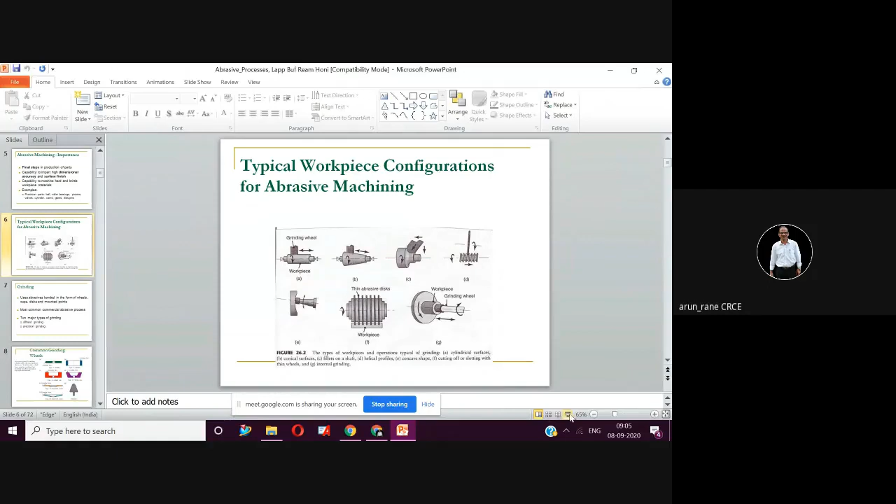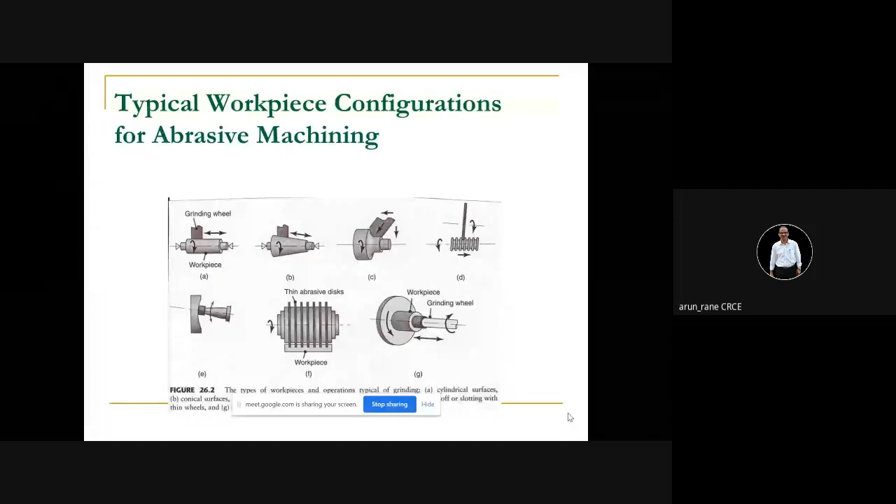So let's start, yesterday we stopped here. Renan, is the screen visible? Yes sir. So yesterday I explained the different types of grinding and how the mechanisms are, and I also told you there are two types of grinding: offhand grinding and precision grinding. Precision grinding means the grinding which is done on machines.

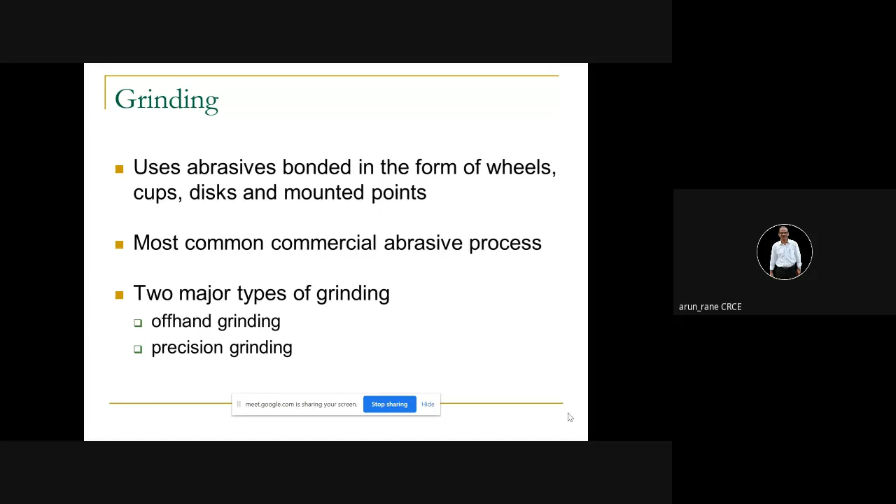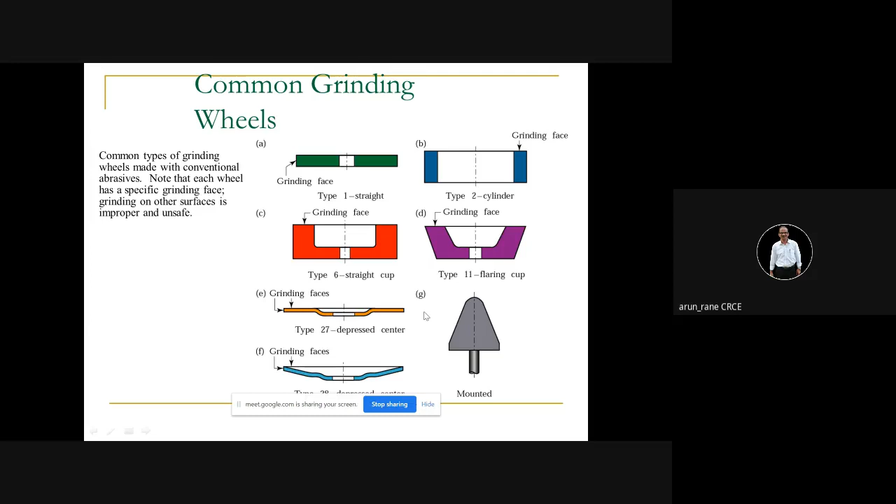Offhand grinding means very open, you must have seen students doing it with a flexible grinder, so that is called offhand grinding. These wheels are used in offhand grinding, and can be easily mounted on the hand grinder, which is nothing but a kind of drilling machine. You just mount this grinding wheel on the drilling machine and it can be called a flexible grinder.

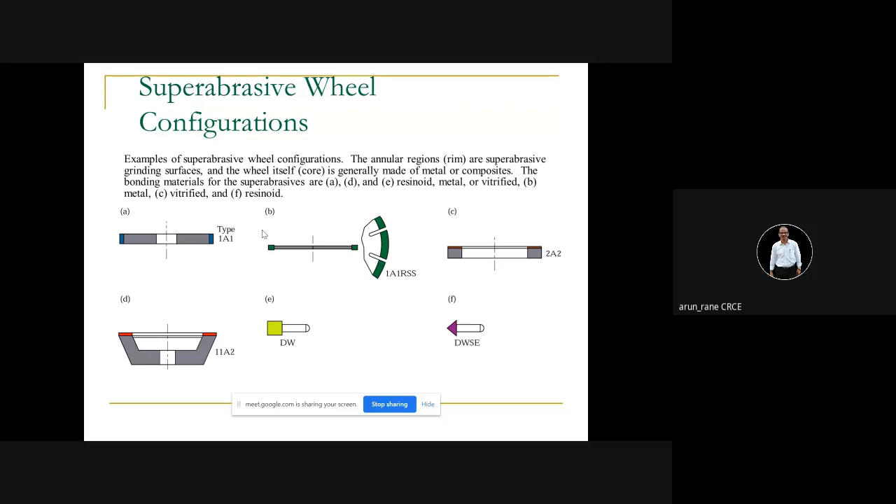Then this type of grinding wheel is also used, called the super abrasive wheels. But you can skip this slide because it is not important from the examination point of view.

This is how your grinding wheels will look like. Basically there are two types of grinding wheels: one is aluminum oxide, and another is silicon carbide. Other wheels are also used, two more wheels, that is one is CBN and another is diamond wheels. So altogether there are four, but two wheels are commonly used: aluminum oxide and silicon carbide.

Out of these, one is for ferrous and another is for non-ferrous. Ferrous means having iron, and non-ferrous means like aluminum, copper, brass, bronze. So generally for ferrous we use aluminum oxide, and for non-ferrous we use silicon carbide.

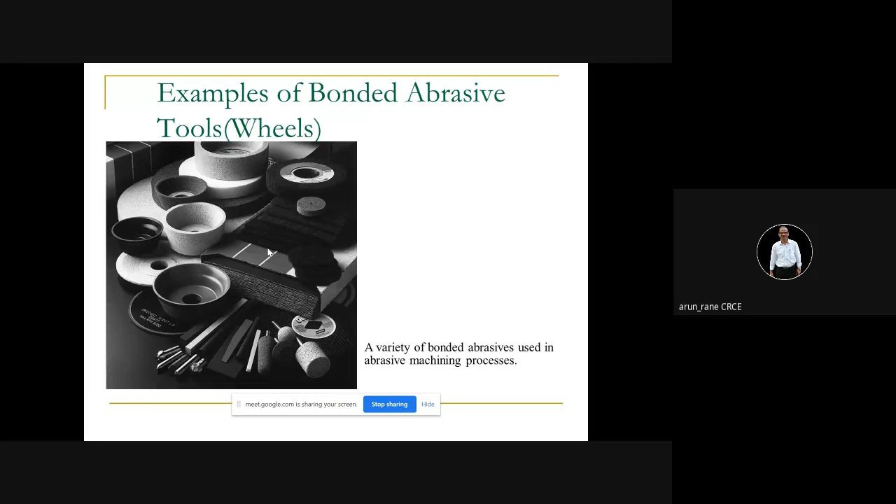Then when to use CBN and when to use diamond wheels: CBN and diamond wheels are also used for ferrous and non-ferrous, but for hardened components. So components which are hard, after heat treatment, if you want to do grinding, then we use CBN and diamond wheels.

So again in offhand grinding you have types: swing type, non-swing type, flexible, non-flexible, etc. Like you must have seen in many workshops we have a pedestal grinder. So pedestal grinder comes under the category of offhand grinding, where you go to the machine with a tool or component and grind it.

So what is the use of this offhand grinding? You can use it for grinding castings, sprues, flashes, runners or gate. Mostly many times flash comes in the casting. Flash is nothing but the extra material which has come out of the parting lines, that is what is called flash.

Then weld grinding, like weld, in order to make it even we grind it. This is commonly used. Tool sharpening, that is your drill grinding or HSS tool bits, single point cutting tools, those kind of tools can be ground. Then miscellaneous rough grinding, like if you want to cut something, that also can be ground. So all this comes under offhand grinding.

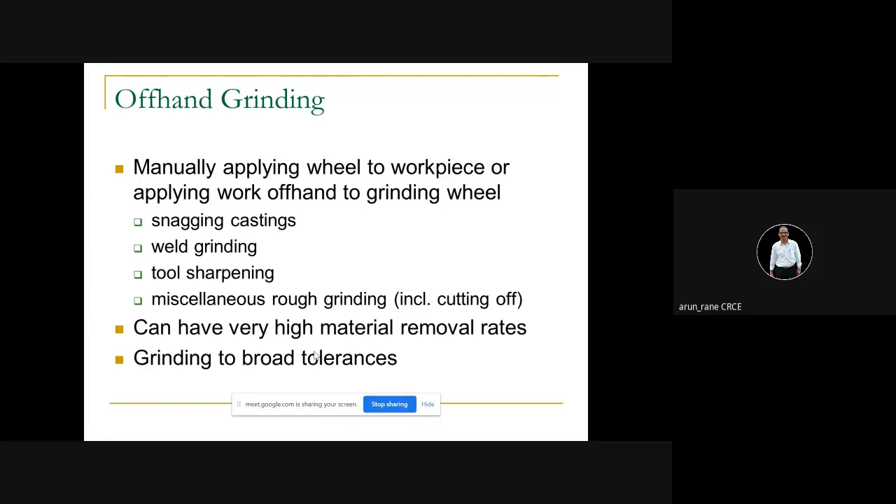Then precision grinding is again classified into cylindrical grinding, surface grinding, tool and cutter grinding, centerless grinding, and some SPMs, that is special purpose machines like crankshaft grinding or cam grinding, and so on.

Actually, I was calling Sahil just before the class, but he was not picking up the phone.

So this precision grinding is very important, and all grindings are important - like in precision grinding, cylindrical grinding, tool and cutter grinding, centerless grinding. Except SPM, that is special purpose grinding, because these are for specific products like crankshaft grinding or camshaft grinding.

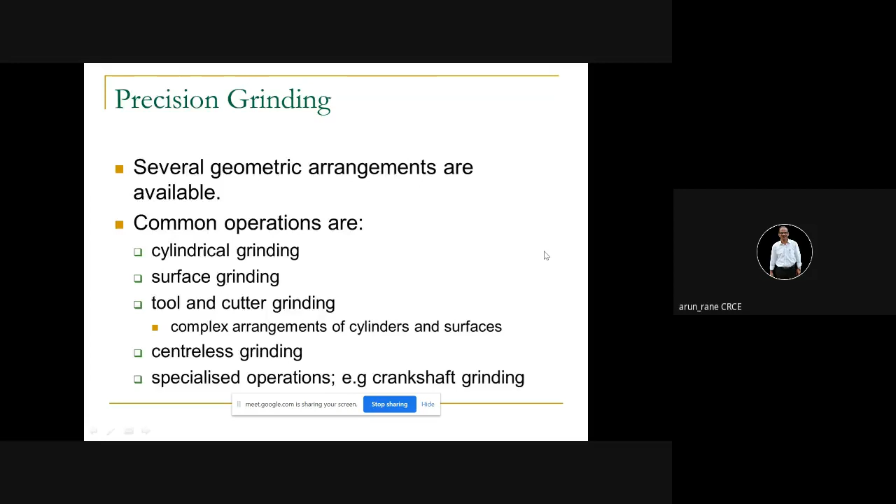So this is how it is classified, you can remember this chart. Precision grinding is classified under cylindrical grinding, surface grinding, and centerless grinding - these are the three which are really important. In cylindrical grinding, you have external cylindrical grinding and internal cylindrical grinding. In surface grinding, you have peripheral grinding, and there are four different types not mentioned here. In centerless grinding, you have external centerless grinding and internal centerless grinding.

External cylindrical grinding has traverse and plunge. In internal you have rotating work and stationary work - generally nobody uses stationary work, so this can be cancelled out. In centerless grinding, external has through feed and in-feed. All these are important from the examination point of view.

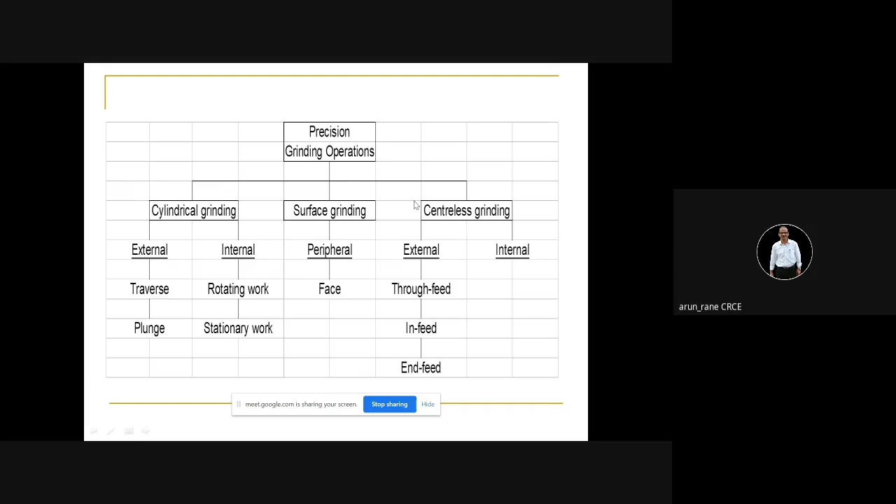In surface grinding, again there are four types. One is reciprocating table and vertical spindle. Second is reciprocating table and horizontal spindle. Third is rotary table and vertical spindle. And fourth is rotary table and horizontal spindle. So there are four types of surface grinding, and all four are commonly used.

So in cylindrical grinding, as I showed you the pics in the beginning of the lecture, the wheel is rotating and the workpiece is also rotating, and the wheel is moved across the workpiece parallelly. For machine time calculations you need to remember the cutting speed, feeds, and depth of cut, but no numerical will be asked on grinding.

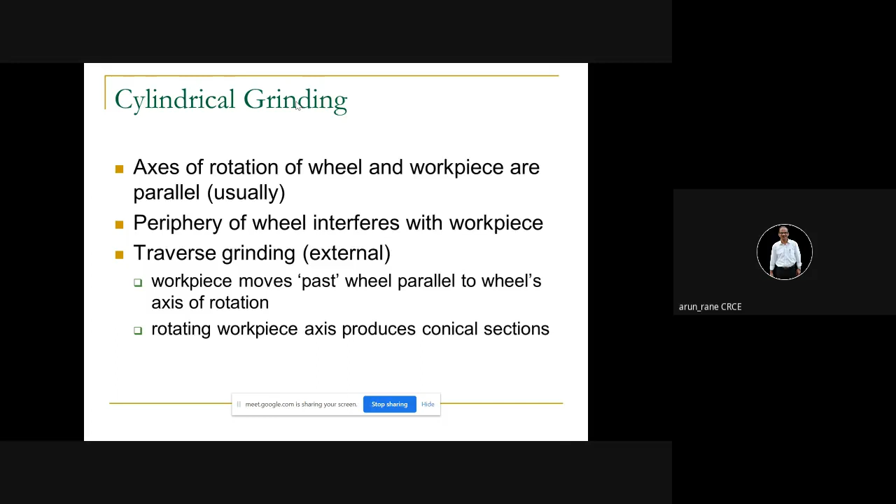So in cylindrical grinding, you can do plunge grinding and traverse grinding. In plunge grinding, what do we do? We press the grinding wheel across the workpiece, and the form is given to the grinding wheel, so whatever form is on the grinding wheel is reproduced on the workpiece. Of course, you will have to rough turn or rough mill before this - you cannot generate the entire surface because grinding is a slow process.

So in plunge grinding, whatever shape is given to the grinding wheel is reproduced on the workpiece. And in traverse grinding, the grinding wheel is fed axially across the entire length of the workpiece.

The workpiece is usually fed or loaded between the centers, and if you are loading it between centers, you have to use a driving carrier on the live end, also called a dog. The driving carrier is used so that your workpiece will rotate with the machine speed. Otherwise, if mounted between centers, there is a chance the workpiece will slip and not rotate positively. That's why all between-center jobs have to be rotated with the help of the driving dog.

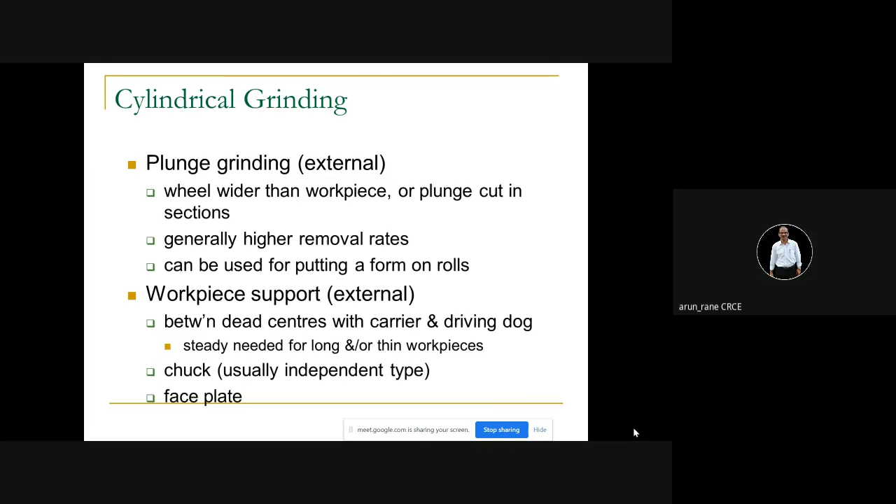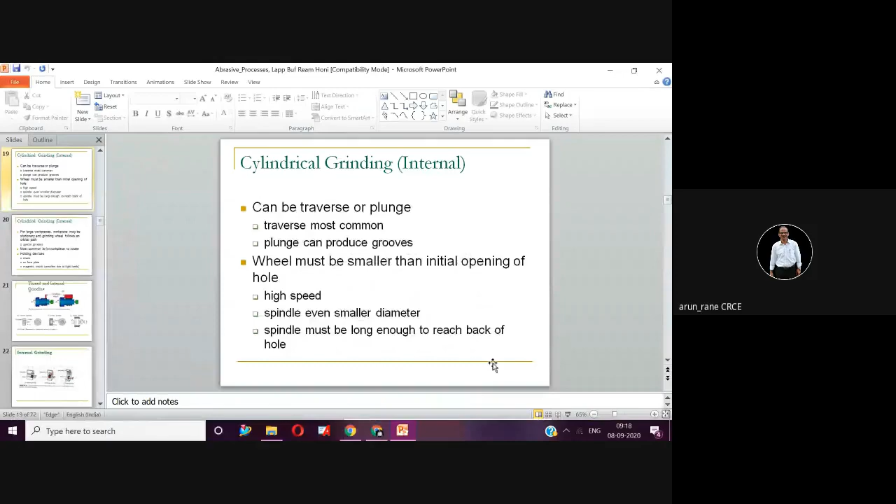Just a minute. This we are done, this we are done. I think I have gone a bit ahead. Yeah, so we are here.

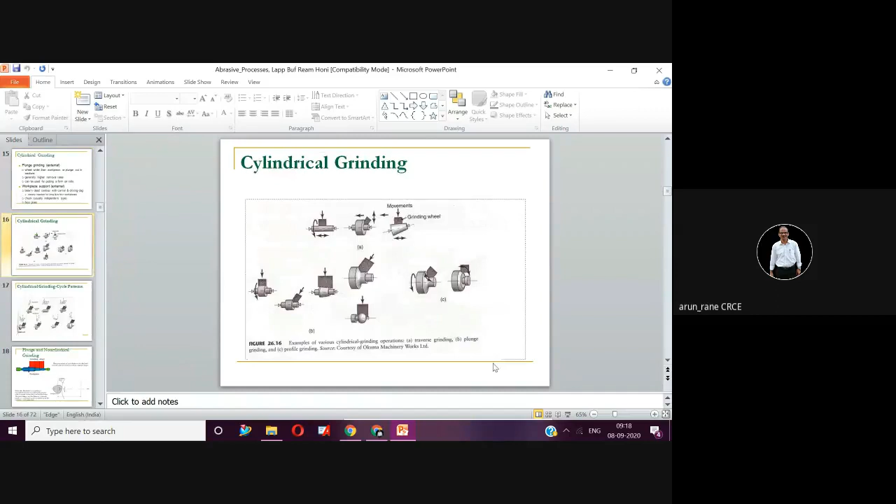So this is how cylindrical grinding is done. Now here the component is mounted between centers - see, this is between center, this is between center. The grinding wheel is fed here and then it is moved. Most of the time the workpiece is moved longitudinally.

Here again, the grinding wheel is fed like this. Here also, instead of the grinding wheel, the component is moved. And this is now a form grinding.

Remember, here the workpiece is tilted at an angle - this is one way of doing taper. If not, then you can give the taper angle to the grinding wheel. This can be done by three or four ways: one is you can tilt your workpiece, second is you can give the taper angle to the grinding wheel, or third is you can rotate the grinding wheel itself like the workpiece. So three methods.

Then these are the types of plunge grinding. Plunge grinding means the feed is given radially, and the workpiece is not moved in the axial direction. So plunge grinding is always faster, provided your machine is capable enough to take the load.

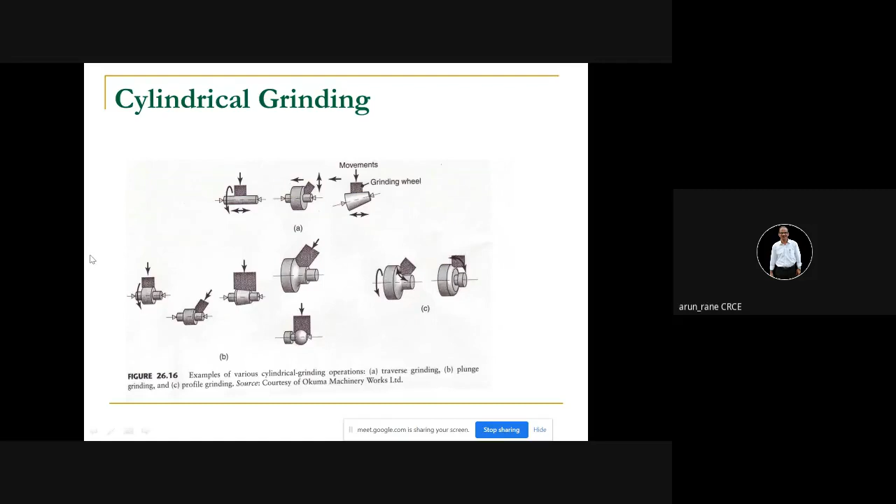These are the different movements, that is how the grinding wheel moves. It comes inside, goes like this, and returns, and it repeats.

Not important from the examination point of view. Now these are all seen. This is exactly like your lathe operation, exactly like your CNC grinding wheel.

But you are using a high speed tool or a carbide tool in a lathe machine. Here on the grinding machine you are using a grinding wheel which has been dressed like a cutting tool. So there is a point here, and then it is moved across the workpiece everywhere. This is actually an example of a CNC grinding machine.

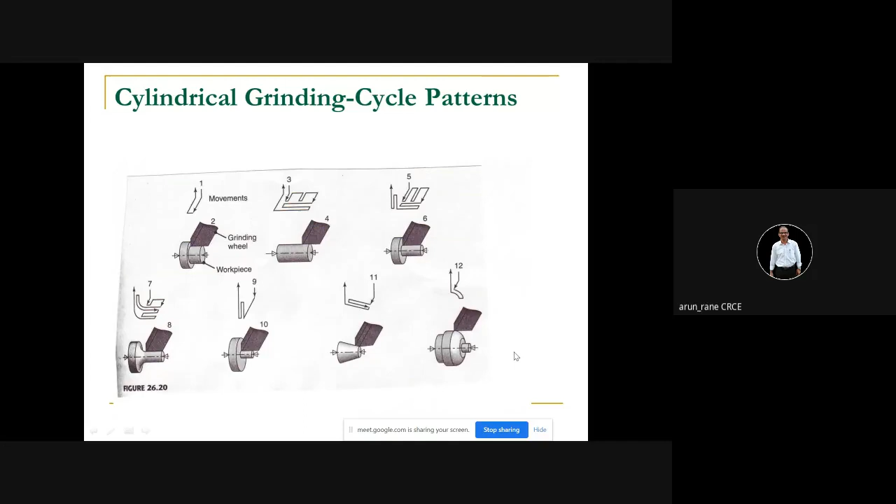So plunge grinding is useful if you have to do mass production, that is, number of components are more, accuracy required is more, and you have shapes like this which cannot be produced by your normal flat grinding wheel. This particular workpiece has so many contours and so many shapes, which cannot be handled by our normal grinding method. You'll have to change so many grinding wheels.

So what you do in this case, we take a grinding wheel having more width, then we raise this shape. We call this a male shape. Then we raise a female shape on the grinding wheel, and then we plunge across.

Generally, we don't use grinding for non-cylindrical workpieces. Cylindrical grinding, I am talking about.

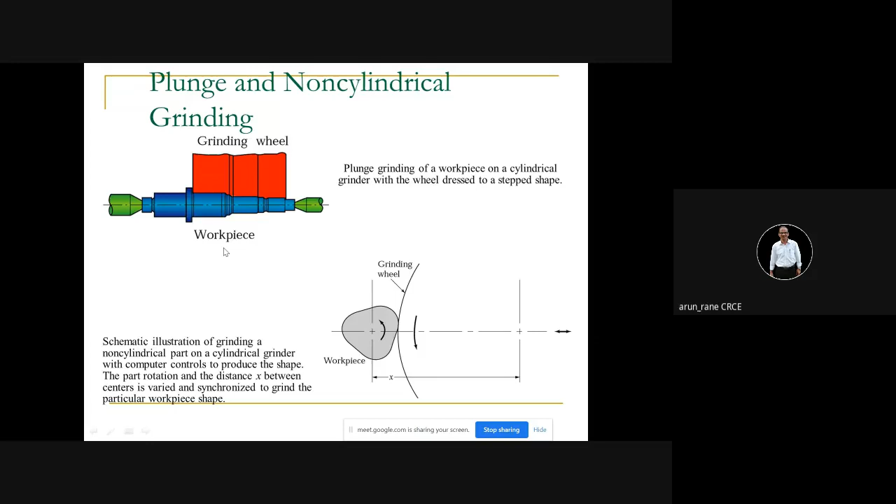Now, as I told, internal grinding is very very difficult, and generally we do it above 25 mm bores. If you want to do it below 25 mm, then we use a special machine called the jig grinding machine. For 5 mm, 10 mm, or even 4 mm holes, it can be ground on jig grinding machines. Below 4 mm, there is a separate technology; there are reamers available, or we do it on wire cut machines.

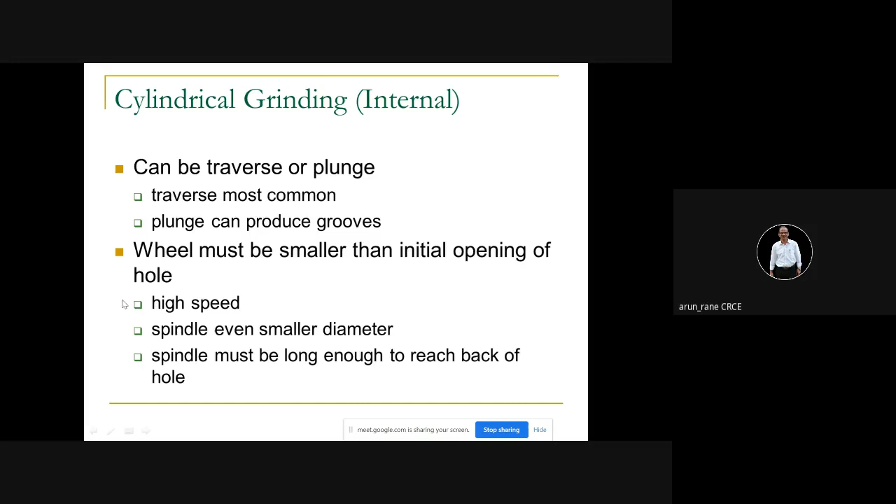Again, in internal grinding you have to be very careful. In internal grinding also you can do it by two methods, that is traverse grinding or plunge grinding. Obviously your grinding wheel has to be smaller than the hole diameter, which is quite obvious.

As I said, generally the workpieces are rotated. But if you want to keep the workpiece stationary, whether it is internal or external, let's talk about internal. Then your grinding wheel must be rotating, that is your internal grinding wheel has to be rotating. And second, your grinding wheel must rotate orbitally, along the bore, so that it will grind the entire periphery of the workpiece.

This is used generally in special grinding machines, SPMs, used for special workpieces.

Again, holding devices can be a chuck. Magnetic chuck also can be used, but these magnetic chucks are used for lighter workpieces. They cannot be used for heavier workpieces because magnetism is not strong enough to hold them.

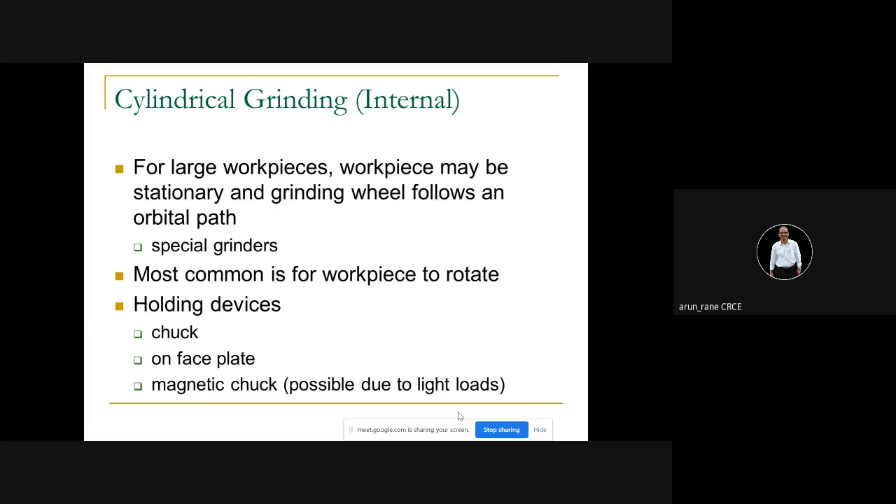Then you can also do threading, that is thread grinding. As I told, thread grinding is performed if the threads are hardened. Most of the times we don't harden the threads.

Suppose you have a component, like a shaft kind of thing, and you want to harden it. So what we do is we mask these threads before you send it for the heat treatment - we mask these threads, masking.

We mask this thread with the help of asbestos material. Asbestos, as you know, is heat resistant. So wherever it is masked, that much portion will not get heated. And the principle of heat treatment is: if it is not heated, then nothing will happen to them. So that is one way.

The second way is you apply a copper sulfate paste, CuSO4, on the portion which is not to be hardened. So for the threads, if I don't want to harden them, I'll apply copper sulfate solution here, CuSO4, so that this remains unaffected.

But now suppose if you want your thread also to be hardened, then definitely after hardening this profile will get damaged, get distorted, and also get oxidized, and then it cannot be used unless it is finished. So you have no choice but to go for grinding, because since it is hard, you cannot touch it up on a lathe machine.

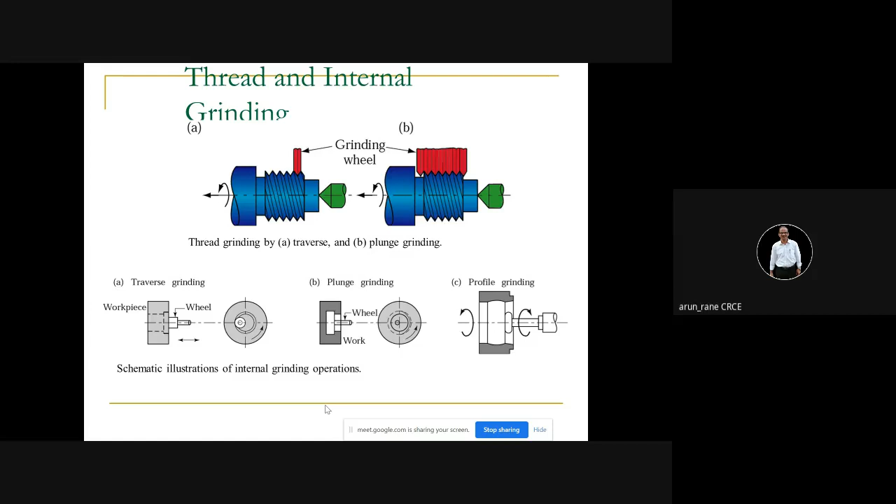So this is an example of profile grinding. I hope it is clear. This is still more clear. The cross sections are taken here.

So traverse grinding means the grinding wheel is rotating. This is the rotation of the grinding wheel. At the same time, the grinding wheel is also moving. So this is traverse grinding.

Here this is plunge grinding. In plunge grinding, what do we do? The grinding wheel is not moved in traverse. It is just plunged.

And then this is profile grinding. So the profile is ground to the grinding wheel and then it is plunged. I hope these pictures are clear.

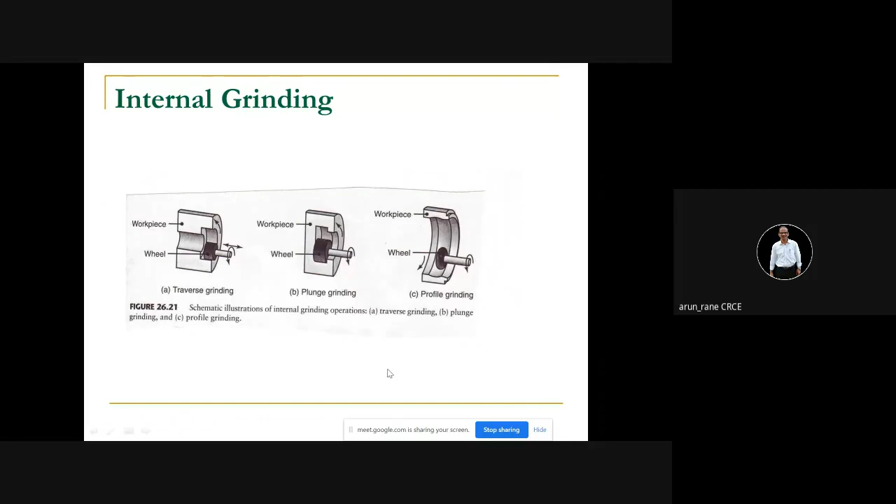Rotary tables are used for mass production. That is, say if you have 50 pieces, say 50 bushes whose face is to be ground, all those 50 pieces can be kept on the table and then the table is rotated. At a time you can grind so many pieces, 50 pieces, 100 pieces, depending upon the size of the table.

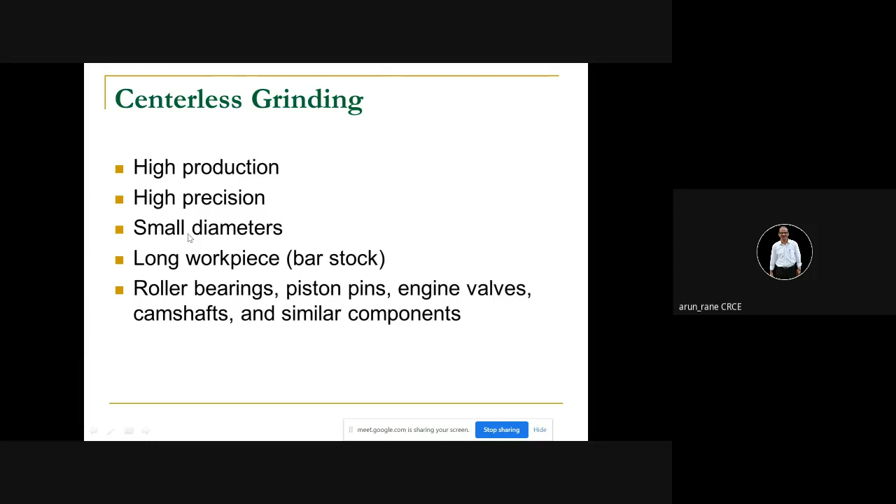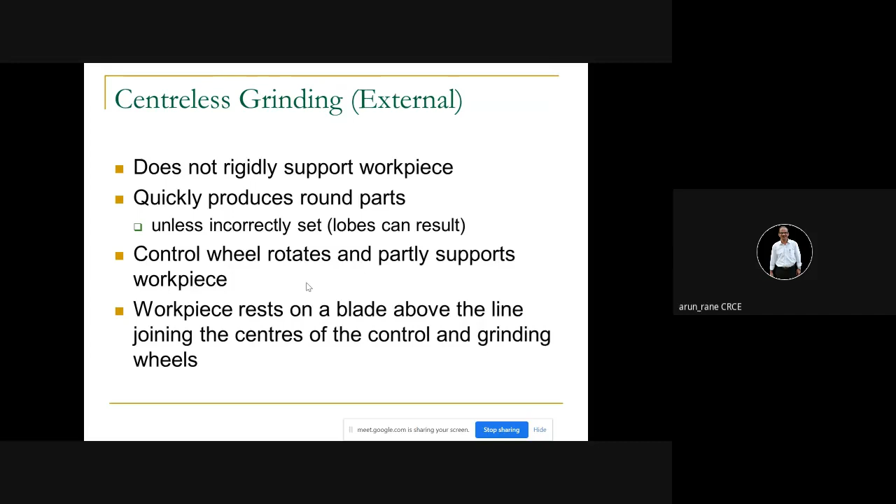Again, in centerless grinding you have external centerless grinding and internal centerless grinding. Normally we don't use internal centerless grinding because of the limitations on the grinding wheel, as I said. So most of the time, by default, centerless grinding is external. And as I said, the workpiece is not held between centers, and that's why it is called centerless grinding. You have three types in external centerless grinding: through feed, in feed, and end feed.

So through feed means the component is loaded from one side and then it comes out from the other side. That's what is called through feed. And how and why does it happen?

See, I'll show you the diagram of centerless grinding. In centerless grinding, the component is held - our component is loaded between two grinding wheels. And if one of the grinding wheels is tilted at an angle, then that gives the feed to the workpiece. That is what is called through feed. So the operator just has to load the component from one side and then it is fed automatically because of the angle given to the control wheel.

Then you have infeed. The infeed method is used for work with portions, like suppose you have two diameters - one is diameter 10, another is diameter 15, with steps, say 4-5 steps on the workpiece to be ground. That time you go for infeed. End feed is used only for taper work. And remember, we always follow through feed.

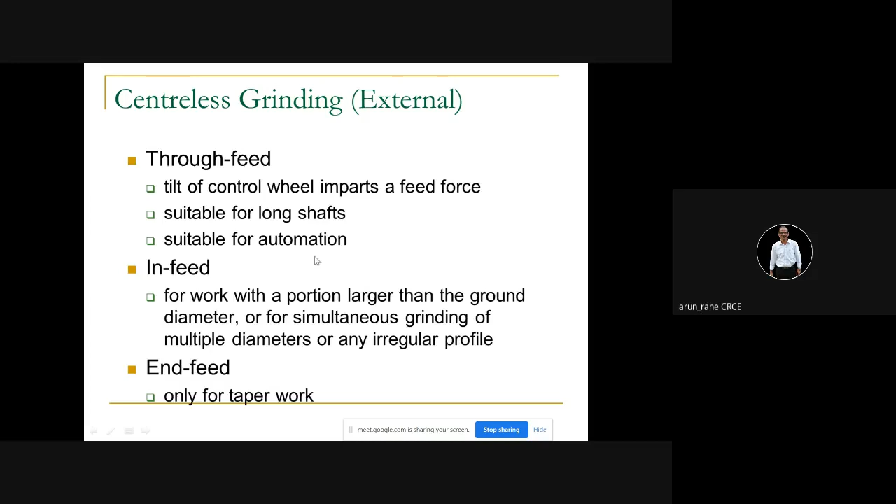How the workpiece is supported in case of internal - it is supported between two support rolls and another is the control wheel. I'll show you the diagram. And then grinding occurs opposite to the control.

There are two wheels in centerless grinding. One is called the grinding wheel and another is called the regulating wheel. The regulating wheel regulates - as I said, it is tilted at an angle so that your component or workpiece moves. The regulating wheel is also called the control wheel because it controls the workpiece.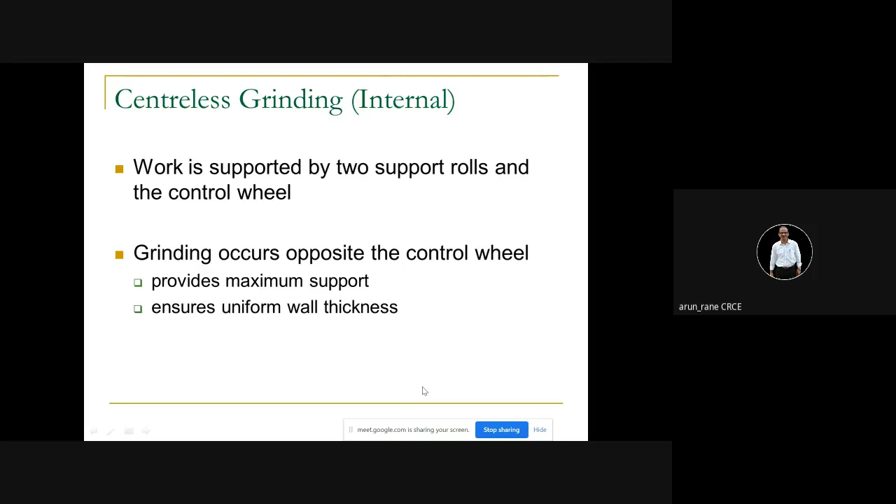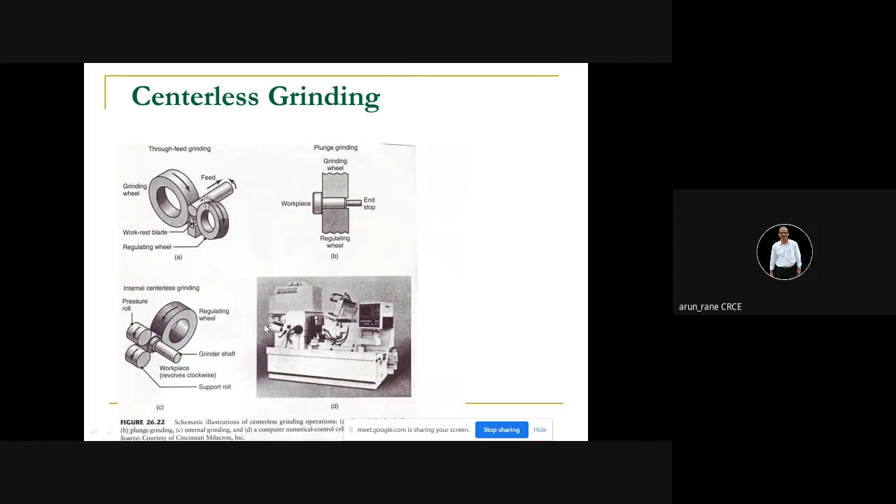Now you must be surprised why I'm telling you that centerless grinding machine is not as precise as external cylindrical grinding. Look here now. What happens in centerless grinding? Say this is the stock, the dotted line is there, and the earlier stock is this. Suppose the diameter to be finished is 10mm.

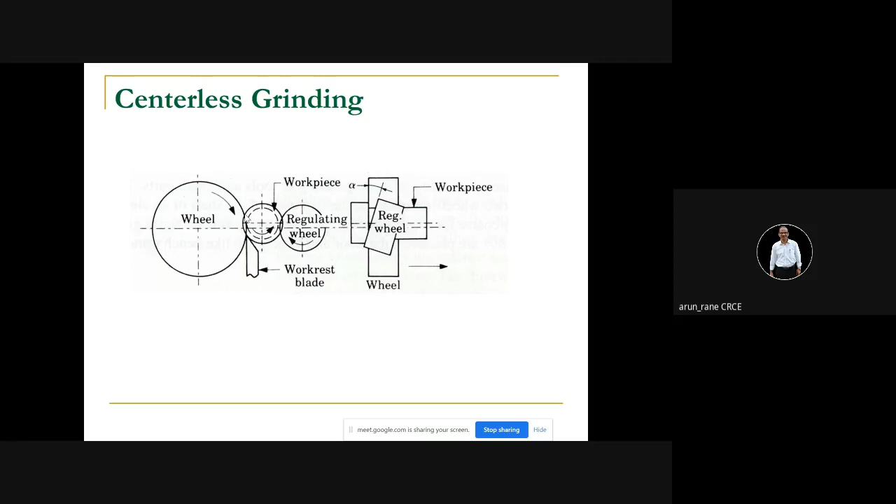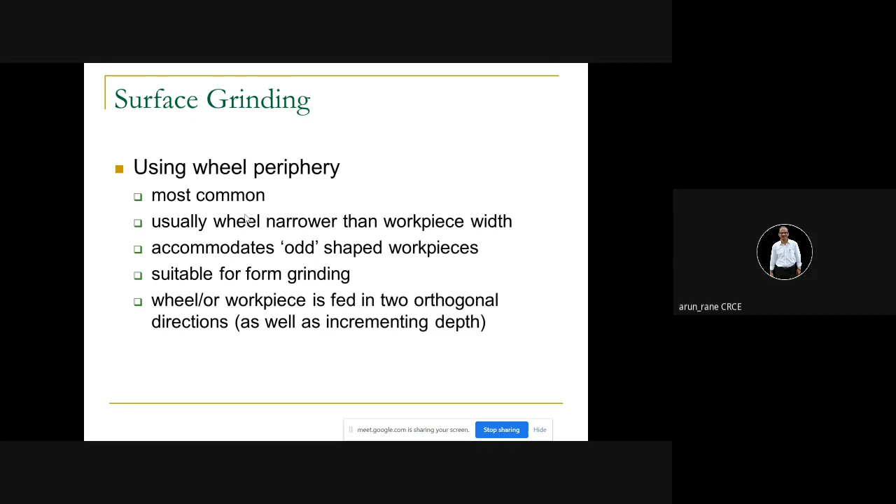I hope you understood this. Then we have surface grinding, where the wheel periphery is used. This is commonly used, and it is important from the examination point of view.

As I told, it can be reciprocating table with horizontal spindle and vertical spindle, or rotating table with horizontal spindle and vertical spindle. The workpiece is supported on magnetic chucks most of the time in surface grinding, because like centerless grinding indicates no centers, surface grinding means the surface is to be ground. The top should be clear, and there should not be any clamps.

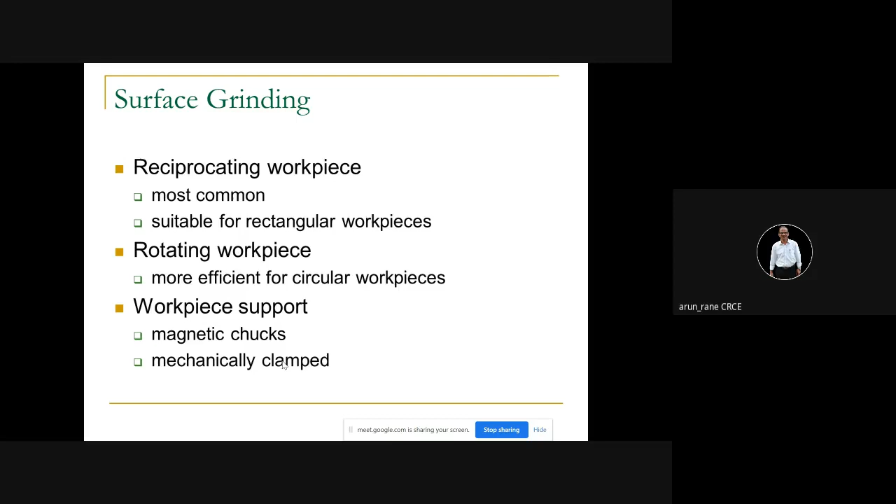That's why the workpiece is mounted on a magnetic chuck. It can be clamped mechanically also, but you have to ensure the clamps are not protruding above the surface of the workpiece. So this is your reciprocating table, where the table reciprocates and the spindle is horizontal.

And this is how your rotary table and vertical spindle works. The spindle is vertical with a rotary table, and there are so many workpieces kept on it. Of course, this can be done on horizontal spindle and reciprocating table also, but rotary table with vertical spindle is much faster than the first option.

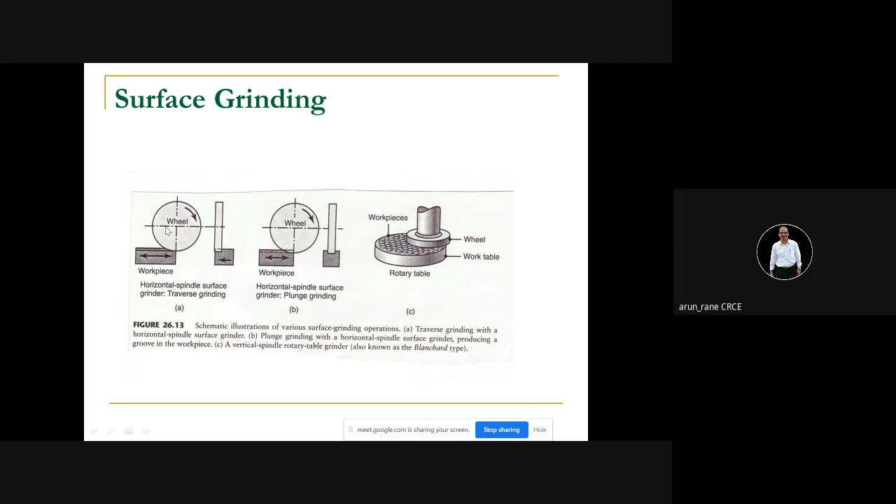This is the diagram of surface grinding which I showed you earlier. The table is reciprocating here, and this is the horizontal spindle. This is the rotary table, which is used for mass production.

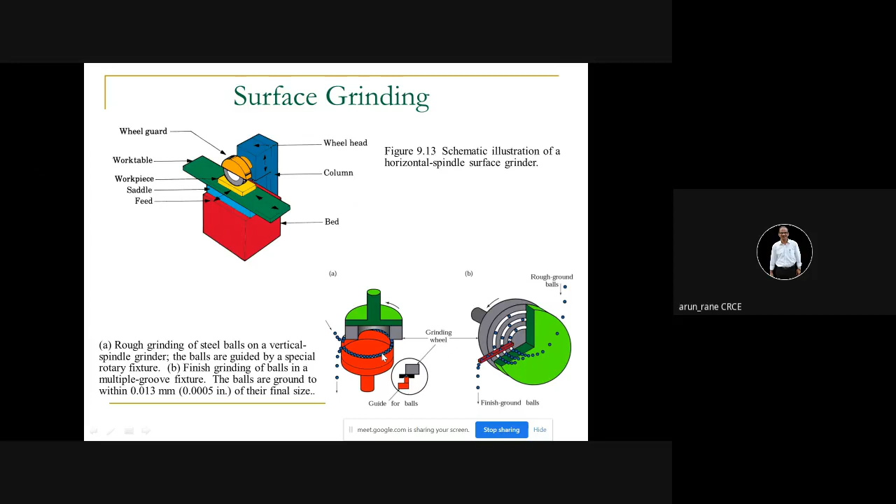Then we have grinding wheel parameters, that is how to specify the grinding wheel. From the examination point of view, every slide of this presentation is important, and grinding wheel parameters are also important. The weightage for this is almost 10 marks minimum, and it can be as high as 15 marks. So you better don't put in options.

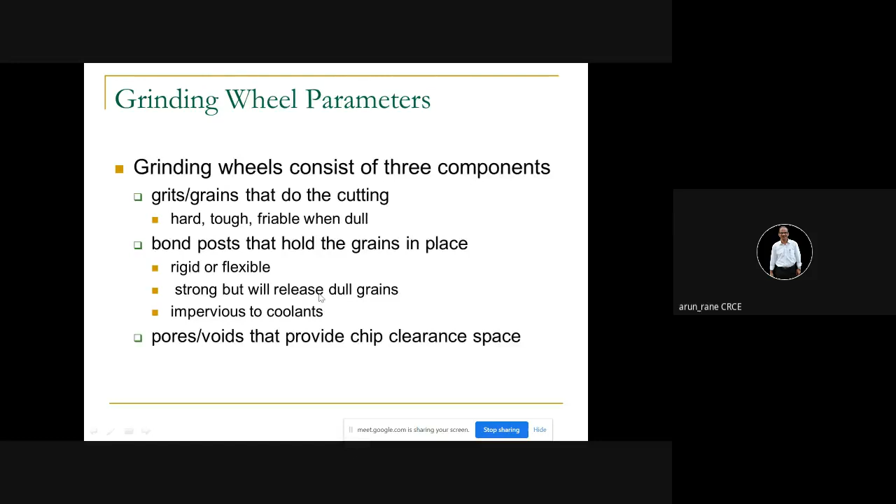Sahil, you joined late or what? I was calling you. Are you there, Sahil? We will use the same link so that you don't have to search. Yes sir, hello, yes Sahil, we will use the same link as requested by you on behalf of the class. I was calling you in the morning. Sir, I woke up late actually. This is the advantage of online lectures, a great advantage isn't it? Yeah sir, I woke up by your call. Thank you for waking me up today. So in 5-10 minutes you can be ready, otherwise if it is offline, then traveling and getting ready takes 1-2 hours. So I honored your request, and I'll be using the same link. All right, thank you so much sir. Most welcome.